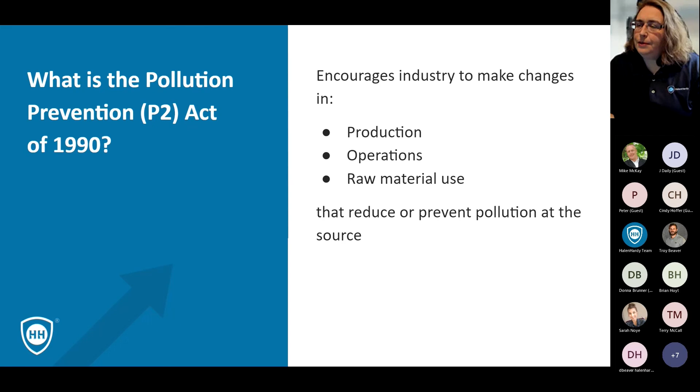Just looking at those ways we can stop it from happening so we don't have a waste to deal with. Pollution prevention practices look at things before recycling, treatment, or disposal, reducing the amount of waste generated. That's the ounce of prevention approach. So if we have less waste, we have less waste to deal with, and that means fewer opportunities for pollution because if we're not putting it into a landfill or treating it, we don't have that volume to deal with.

And also we'll have fewer public health hazards. When we look at the longevity of a landfill, if it's not properly landfilled, if they don't have the proper liners in there, that can present hazards to people down the road. If we're looking at deep well injection for any of our waste, again, less waste means less opportunity for that to become a public health issue.

So it includes technologies, it includes reformulation. Think of the efforts made to remove chlorinated solvents from different processes. Thirty, forty years ago, it was common for people to use a chlorinated solvent just to degrease a part. Now we have found alternative methods for that—traditional solvents that don't have a chlorinated base, or even citrus-based solvents. So looking at redesigns, something that does the job just as well but doesn't have those heavier pollution issues.

Substituting raw materials—this could be looking at how different products are formulated, and what we can do to prevent those things from polluting the environment after we're done with them. Improving housekeeping—this could mean making sure that when we bring in our raw materials, we bring in enough for the process we're doing, but we don't have a ton of extra left over that then becomes a waste.

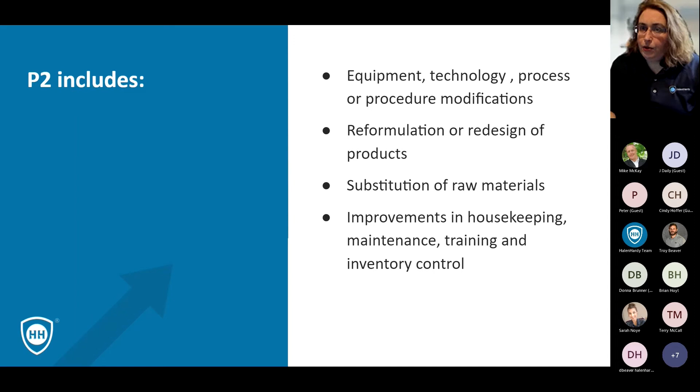P2 is not recycling, it's not energy recovery, and it's not disposal. These things are all good, these things are all important, but at this point you have created that waste, and P2 is taking a step back and saying, how can we not create it in the first place?

Just like we've always heard with the hierarchy, of course we want to recycle when we can, we want to treat it and reuse it if we can, and disposal, if we do have to take that option, we want it to be in the most responsible manner. But those things are not specifically included in your P2 efforts.

As we look at the new focuses for industry on sustainability, a lot of companies have embraced the zero waste concept. If we make those P2 efforts in the beginning, then we don't have to worry as much about that zero waste on the back end.

So again, we mentioned that $100 million has been allocated to help businesses with those P2 efforts, and they can be used in a lot of different ways. Some of the ones mentioned within the bill were reducing toxic pollutants.

That could be looking at using different solvents, using different raw materials, using things that are less hazardous to begin with, so that we're not generating those products to be used within our processes.

Cutting our water usage. Is there a better way that we can recycle that water, reclaim that water, reuse that water, so that we're not always pulling in virgin water to cool a process or to warm a process?

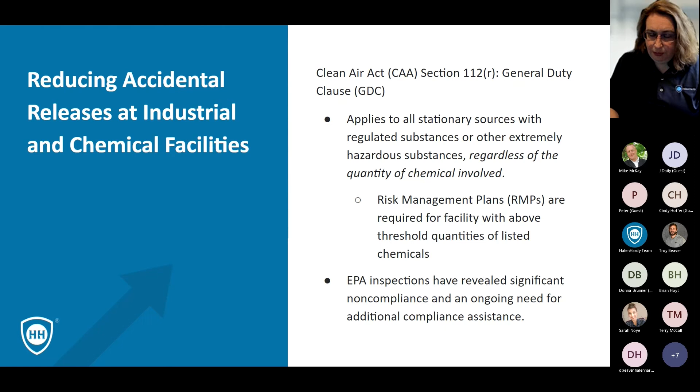So what is an extremely hazardous substance? It's not really defined in regulation. When the act was passed, they used the term extremely hazardous substance but never defined it within the requirements, and EPA does not have a strict definition for it either. The Senate did put in their report that it could be any agent that's listed that has exposures, but they've really expanded that with interpretation to include a lot of different things.

So some of the things you may look for to help determine if you've got an extremely hazardous substance and need that general duty clause plan: if you have anything on the TSCA inventory list, you probably need this plan. If NIOSH has it listed - something in the NIOSH guidebook you need to check respiratory limits for - that could be an EHS. If OSHA has information on it, NFPA - this would be mainly flammable liquids - of course the CDC or the ACGIH, who've done a lot of work with threshold limit values and ceilings for different pollutants. If any recognized agency out there has any sort of guidance on a chemical, that could be an indicator that it's an extremely hazardous substance.

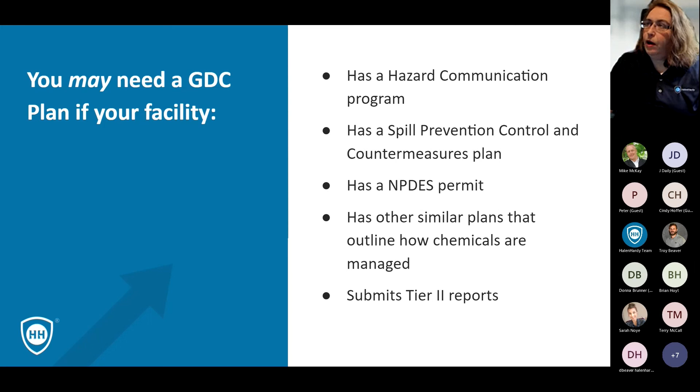Other things that may facilitate that: if you have a HAZCOM program - so if you've got hazardous chemicals on site and a HAZCOM program, that could be an indicator. If you have an SPCC plan, an NPDES permit, or if you submit Tier 2 reports under EPCRA, these could all be indicators that you've got an EHS on site. Again, may not be in threshold quantity, may not be something you're specifically planning for, but this could indicate that you do need that general duty plan.

The good news about a general duty clause plan is that chances are you've already got all the elements covered somewhere else. It's just a matter of making sure they're all in line and you can pull those out if you ever were to have an inspection. So you need to identify and assess your hazards - this could be in the form of a job safety analysis, a JSA, or a job hazard analysis, JHA, a lot of different ways to do those. Basically looking at your processes and procedures and saying, okay, what is hazardous about them and what am I doing to protect myself and the environment, and just outlining those things so you've got a record of them.

The second element of a general duty clause plan is to design and maintain a safe facility. This is probably also something you're doing already - you've got processes and procedures in place that are going to keep your workers safe and prevent spills and protect the environment. It could just be a matter of taking those from other plans and reorganizing them for this plan. The third is to be prepared for spills - making sure you've got the tools, the resources, the people, the training, everything in place so that when there is a spill, you're able to take care of it quickly so it doesn't get into the environment, and it doesn't harm either your workers or the public. So mostly elements you should be familiar with from other things, but having those together so that if you ever do have a general duty clause inspection, you have them ready for an inspector.

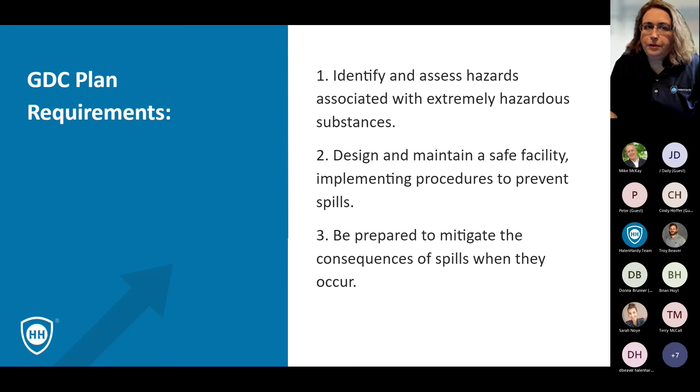The next compliance enforcement area is non-compliance dischargers, stemming from NPDES permits. A lot of people are covered under general permits, but there are 46,000 entities that have individual permits. With an individual permit, the limitations for any pollutants getting into the water are individually marked within that permit. They found that more than 20.3% of facilities were in non-compliance.

When they made this a compliance initiative, they specified that facility size doesn't matter. When we think of individual permits and EPA coming to inspect us, we usually think of those big smokestacks, those larger facilities. But they've found it doesn't necessarily have to be the big smokestacks creating the biggest amount of non-compliance. If you've been non-compliant for several years, you have an equal opportunity—we're not just looking at the big guys for this compliance initiative.

The violations could be that we have to do periodic reporting for our NPDES permit. They're looking at those permits and reports and saying you've exceeded your limitations for several months or years now—that's a violation, we need to look at what you're doing. We need to look at possibly restructuring your SWPPP, your stormwater pollution prevention plan, so you're not having those exceedances. Maybe you need new filters, new processes, more training—whatever it is—to get within the terms of your permit.

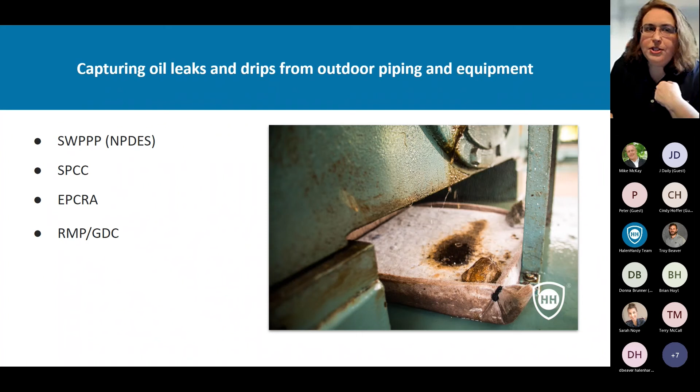There are different things we can do to address this: create secondary containment systems, throw kitty litter under it, and many other options. The better we maintain these things, the less remediation we have to do, and the better we prevent oil sheens from getting into our water systems. We will be providing you with a cost calculator—a tool we've developed so you can put in the costs of what you're doing and compare them with changing your methods or looking at improved methods to handle a situation more effectively, both from a cost standpoint and a time and labor standpoint.

If you're currently using white spill pads to put under machines, equipment, or leaky pipes, this is what it can cost you if you've got 10 areas. It could be $37,000, where if you look at replacing it with a Husky pan, it's going to save you a lot of money in labor costs and create a lot less waste. It also helps prevent the need to go out and dig up soil that became contaminated underneath those pads.

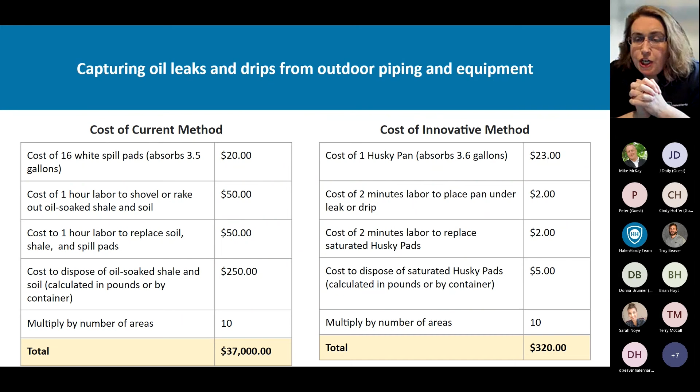So this is something you can use in the cost calculator. See what it's costing you to do it whatever way you're currently doing, and see if you can save money by changing methods, updating your plans, and updating those resources.

An area that factors into a lot of plans is draining secondary containment systems. Secondary containment systems are a great feature. They're a nice safeguard because they're always in place. If a spill happens, you don't have to worry about it getting into a neighboring area because it's all contained. That's the point of a secondary containment system. It's a great passive method that EPA looks for, and EPA is very happy to see those systems in place because they prevent so many spills from getting into waterways.

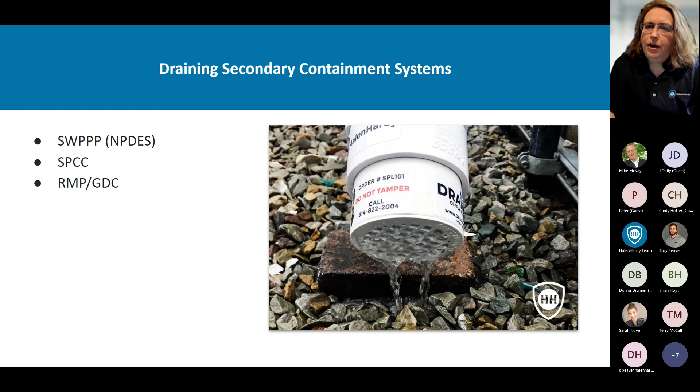However, they do take time to maintain, and a lot of times the maintenance involves somebody going out and manually draining the system. If you've got systems that hold 10,000 gallons or even just 500 gallons, they can take a lot of time to drain, sometimes 3, 4, 5, even 6 hours. That means somebody has to sit there and physically watch water come out of the valve, which can be really boring. So consider the amount of time, the number of drains in your system, and the labor cost of somebody sitting there watching a valve drain.

Also consider the cost of vacuum trucks. If you come upon a system with an oil sheen, you can't discharge it because oil is present. Consider the cost of having somebody pump out that system each time an oil sheen is present. Those things can slowly add up to a lot of cost involved with draining secondary containment systems.

An innovative method we've introduced is the Drainiac oil filter valve system. This system allows the secondary containment system to drain, but it filters out and removes any oil so you don't get any discharge. In the event of a spill, it automatically closes off so no oil is discharged. It's a nice fail-safe that helps prevent valves from being left open, keeps those systems clear, helps prevent mosquitoes from forming in the summer, and is a nice way to improve the system and reduce labor costs.

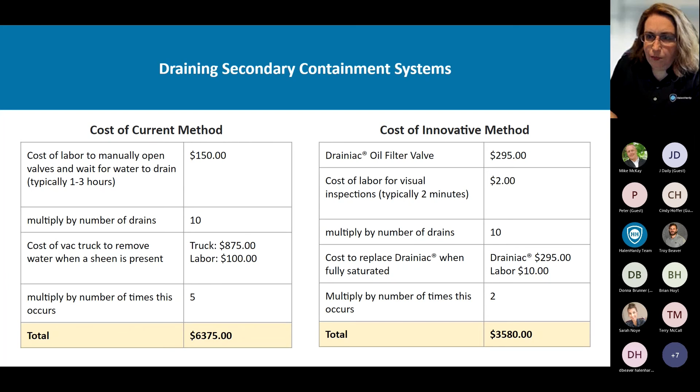Another thing that factors into a lot of plans is maintaining storm drains. For most people, storm drains are the last line of defense, the last chance to capture oil, sediment, and debris before it's discharged into a public water system or into a stream, river, or other receiving water. We see this factor into NPDES permitting, into SPCC plans, especially with potential oil sheens over a large area, and it can even factor into your risk management plan or general duty clause.

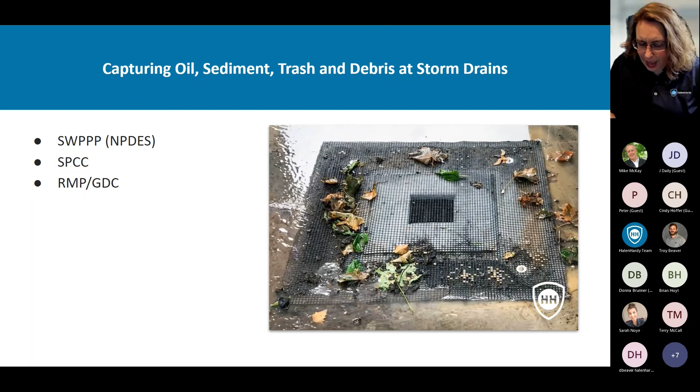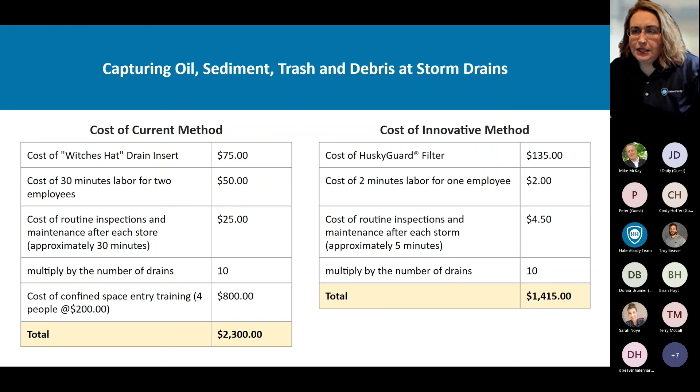This is becoming more important on construction sites as well. If you're doing any large construction project, keeping things out of those storm drains is becoming a big enforcement focus. There are a lot of different ways to do that - we've seen it done with sandbags, silt fences, and witch's hat drain inserts. Effectiveness can vary, but there are ways to save money, time, and labor costs.

The next one is removing oil stains and sheens from paved areas. This is something EPA is really looking at because it's low-hanging fruit. If you're going into a paved yard, parking area, or a paved area with materials stored, it's very easy to see those oil sheens, especially if it has recently rained and the ground is still wet.

So this is kind of that low-hanging fruit that they're looking for, because those oil stains and sheens happening on paved areas indicate that something isn't going right, and start to indicate a lack of maintenance that the EPA may want to look harder into when they visit a facility. Being able to keep those oil stains and sheens off of your paved surfaces is going to help you if you do have an inspection, or even if somebody is driving by. It's something citizens notice as well, so if you want to maintain that public image, you want to keep those things off of the ground.

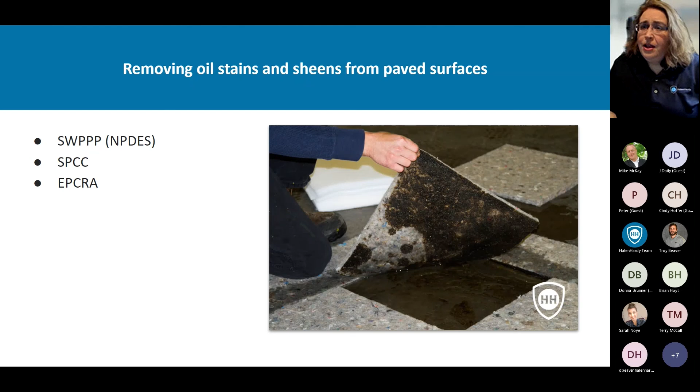One of the most common ways to do it is to have somebody come in and steam clean or pressure wash, and that does cost a lot of money. You're also introducing a lot of chemicals to the process, and if those aren't captured correctly, they get into the water system and can cause pollution problems. So looking at improved methods will reduce the amount of waste created and help save you time and money, keep those surfaces looking great, and you won't have to worry about calling somebody in every time you've got a sheen on the pavement.

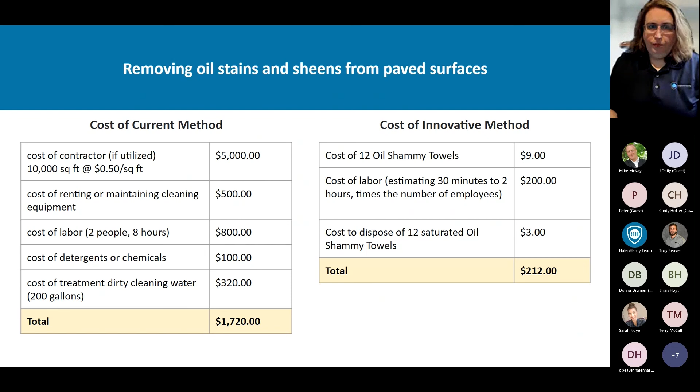Contingency plans are something that figure into just about every plan that you've got out there. So yes, we plan for the best, we train our people, we do all of these proactive things so that we're not generating any kind of waste process. But we all know that spills happen.

Spills happen daily. If you look at the National Response Center, these are just spills that have to be reported. Spills are reported on an average of 20 to 30 per hour every single day, 365 days a year. So it's something that happens quite often throughout North America, and something EPA requires you to plan for, so that when they do happen, you're ready to go and have the resources, tools, and training that you need to make that happen.

A lot of people will plan for large spills by hiring a spill contractor and keeping them on retainer, which can be very expensive. Contractors are great, they're knowledgeable and skilled, and have great resources, but they do take time to get there. That time can still leave you in a lurch, and there are a lot of things your employees can do until the contractor arrives to help prevent those spills from getting off site, so that when the contractor does get there, they're able to respond quickly knowing efforts have already been in place.

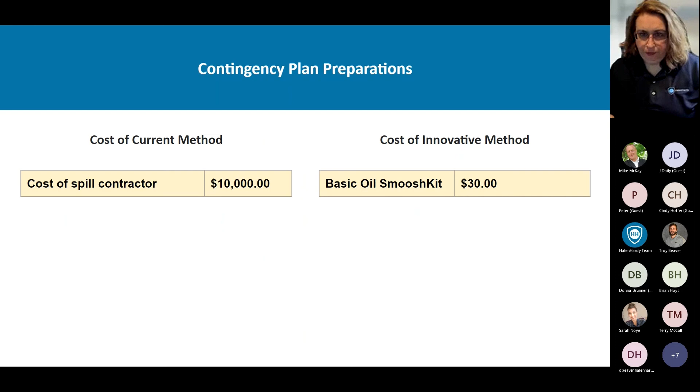The last area is required trainings. There are a lot of trainings required in the regulation. For example, under SPCC, anybody who handles oil products has to have an annual training. Within your NPDES permit, one of your best management practices might be to keep your people trained on the practices and procedures they're using to prevent pollution. If you are a large quantity waste generator, you must have required training for all employees handling hazardous waste. All these things are designed to make sure people working with chemicals or materials that can create a pollution hazard know what they're doing and how to handle both everyday situations and unusual events such as spills.

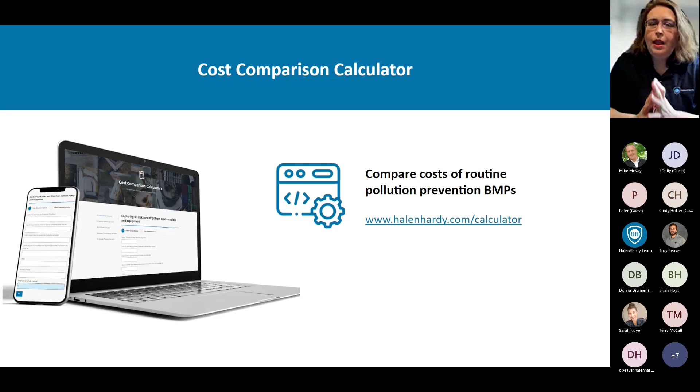Thank you, Karen, that's great information. I have a couple questions for you. We've been hearing more about ESG. Can you share some examples of how organizations are establishing strategic ESG roadmaps and frameworks? It's coming up more and more, we're hearing more about it. Would you mind sharing that?

Sure, I'd love to. ESG, for anybody who's not familiar with it, stands for Environmental, Social, and Governance. It is actually being driven by business, so it's a topic a lot of businesses are looking at because it's important not only to the public, but also to shareholders.

Within the environmental realm, the nice thing about ESG is it's scalable to any organization. It could be that you are looking for zero waste, or introducing your waste back into your process to better achieve that zero waste. It could be using less hazardous materials, whatever that means for you. It's scalable so that if you're just getting started, you can see success, but if you've been doing this and have sustainability efforts in place, it's something you can always grow and improve.